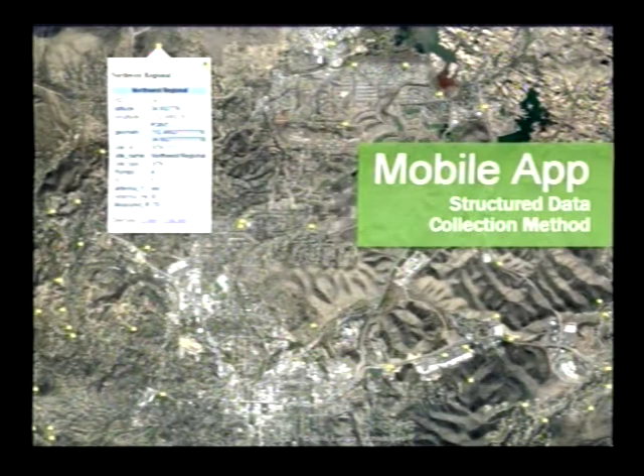The little yellow dots are each one of the sites throughout the town. And as we honed in, we can start to collect more and more information on specific sites, which allowed us to really control that data. As we hone down even farther, we're connecting and collecting data on how we're going to wire up each individual part, what the condition is, where things are mounted, all those different specific pieces of it.

And what that came down to is now we have over 100,000 different data points. When you take all of these different pieces and interface them, it created this large database, which allowed us a lot of different flexibility in interacting with that data.

So the team sat down, we took all of that different data and started aggregating it towards a consistent report format, basically saying this is what we have, this is how we're going to implement that standard for that specific site. It basically aggregated all those different data points.

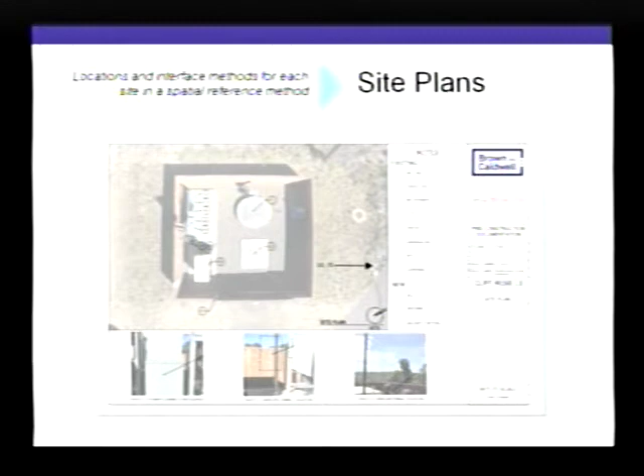We developed site plans, and this was really the visual methodology to allow us to locate things, right? So where that new panel was going to go, where that new sensor type of place, this is the overview to give that visual interaction of where pieces would go.

And then the big thing was cost. So every single little part that we looked at putting in has an associated cost, the labor, the materials, all those types of different things. And the big piece that came through this was really developing as a team what's the right balance of cost versus value.

You can install the latest and greatest technology, or you can install something really basic. So we looked at site criticality, the technology at the time, what's going to best support our long-term viability of the system, and really what's going to give us the best value versus the cost. So the team sat together and utilized that database to determine a balance.

So right now we're still working through those costs. We're looking at approximately a 2-year construction schedule starting sometime in April and going through March 2020. The big thing is with 100 sites, we're looking at concurrently developing those sites. So we'll start on a couple sites at a time and basically stage them as they go to be able to make that in a 2-year construction schedule.

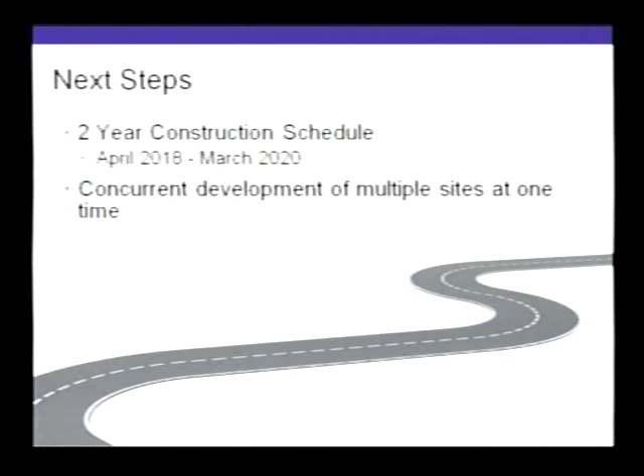So we'll show you guys a little piece of what that database looks like. So this is hitting the reporting structure, and you can see all these little dots in here. Each individual site has a lot of different points.

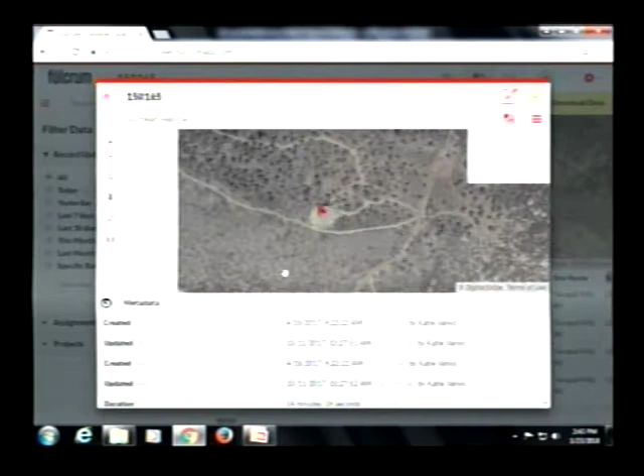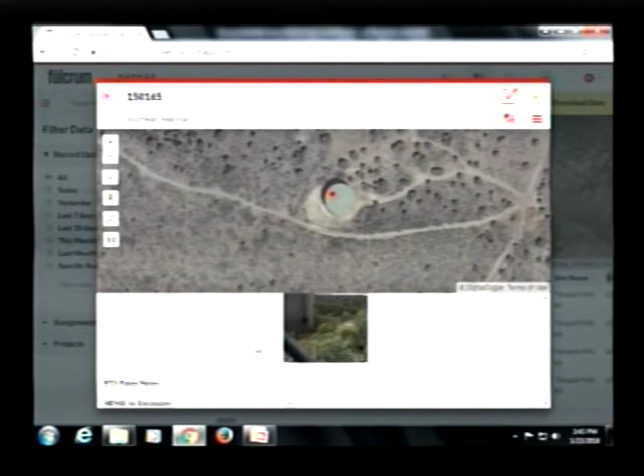So you can see this tank, right, Southwest Regional Tank. When we visited the site, where it's at, how are we going to mount certain panels, structures like that. The existing condition, basically the aggregation of all of this data so that we could apply those standards and really have an understanding of that implementation method and really what it's going to take to apply that standard at that site.

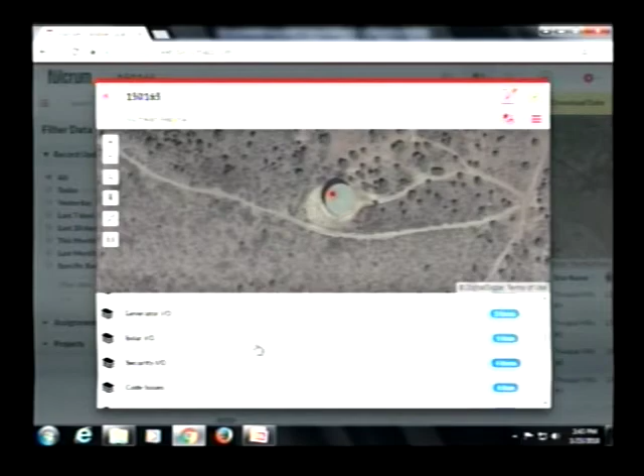As we mentioned, our existing system, when we get an alarm, that's all we get is an alarm. A couple of you recently, through our tours, have been able to see some of this. And then we can zoom out.

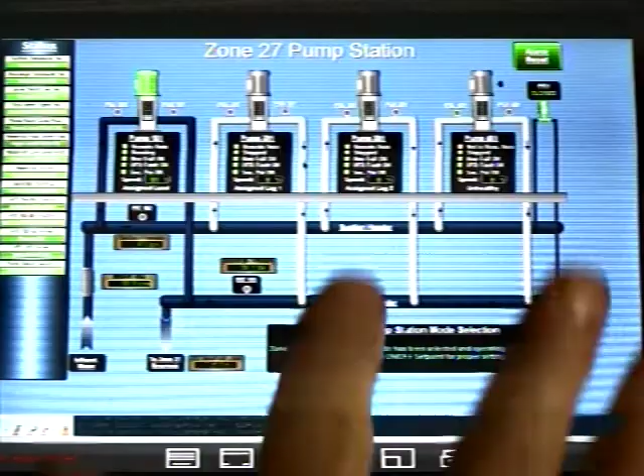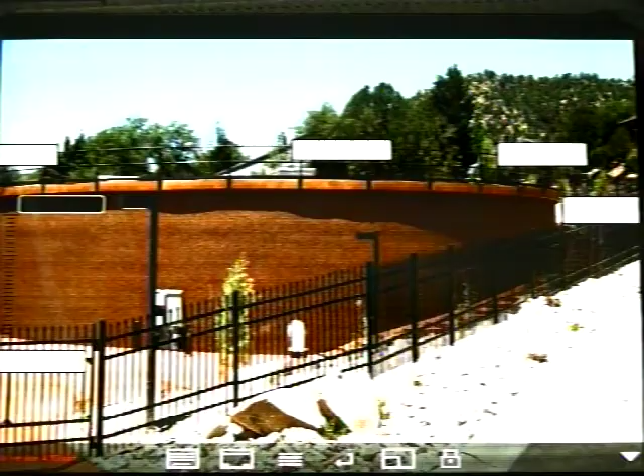So as we have added these in, let's go back to a blank page, kind of the raw pump station. We've added each of these in as the projects have been done.

So now, when we get an alarm, the operator has his tablet. He's able to go in and look at the alarm and see exactly what it is - the tank is low, the tank is high, the pump has failed, we have a power outage, anything like that. He can get that information on the tablet.

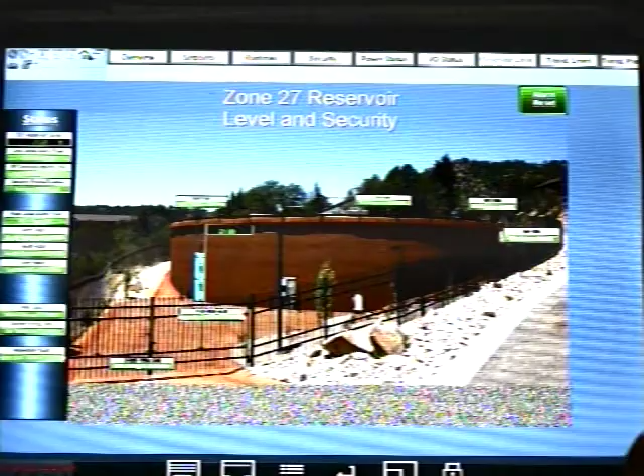Some of our sites we're also putting control into. So right here from the tablet, if Brady needed additional water in the airport area, he can go in on his tablet and turn the well on and get more water. If we have a fire situation, instead of someone having to respond and go to the facility.

Okay. Now, okay, this is pretty cool. So this is all new, future.

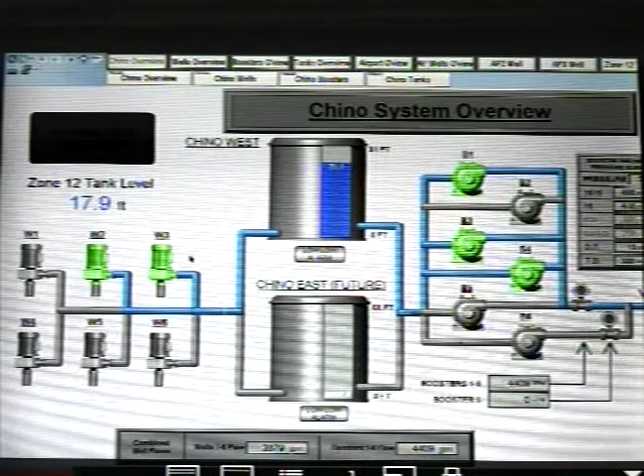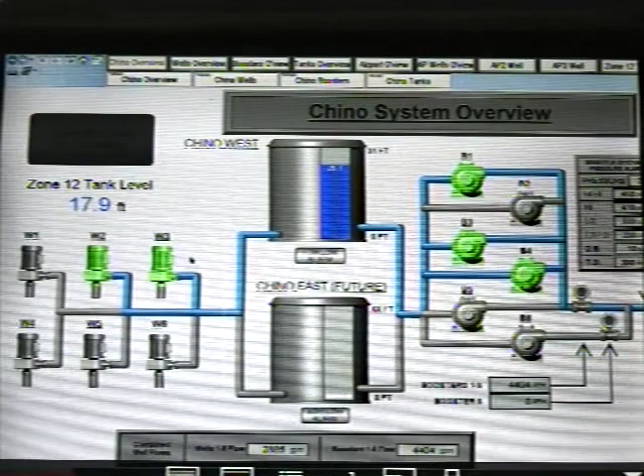Here on the left side of the screen, that's well number 2 and well number 3, are green, telling us that they're both running. Kind of bottom left is telling us that there's 2,879 gallons a minute coming into the tank from those 2 pumps. On the right side, we have boosters 1, 3, and 4 running, sending 4,404 gallons a minute into the city currently, and we have 25.1 feet of water in the tank.

So this is a matter of having that information there so we can know what is happening. At the time when we get the alarms, we can look and find the exact problem. Currently, we get the alarm, someone answers the phone, and they have to leave, go to the site, walk in, and figure out what it is.

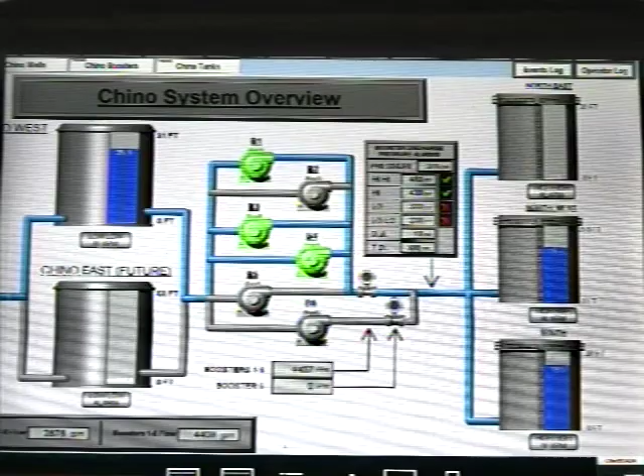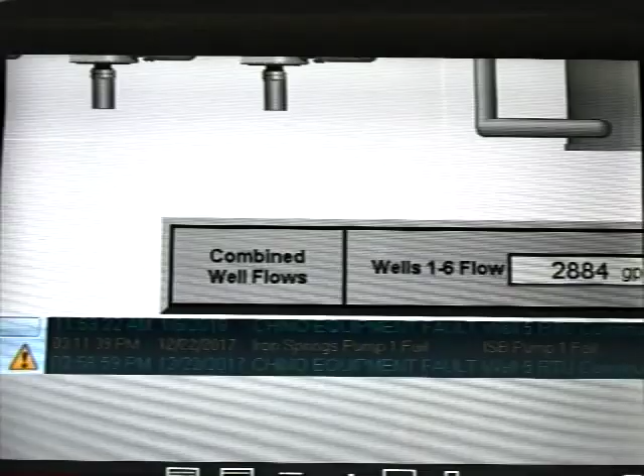So with that, if there's any questions, we'll be happy to answer those for you. Councilman Good?

The premise for installing and utilizing this new system is based upon your estimate of an archaic system that's causing a lot of time, equipment, and labor costs. Have you quantified that and found out what your cost recovery will be for installation and acquisition of the new system? When will you recover that cost by saving all this labor and equipment? And I guess after that, it'll be a return on investment.

We are working on that, and that will be part of the presentation when we bring the construction contract forward. Thank you.

Other questions or comments? Mayor: yes, I have a quick question. So I was out and Brady showed me this system about 1.5 years ago. So you guys are now pretty active in 9 sites, right, Craig? Is that what you're saying? Right on 9? Yeah, yeah.

And we're going to go to 100. So within the next 2 years, we're going to keep putting these on. Not everything's going to go live at once - we're going to go as we go. Each site, as the construction is finished there, it will be added on. It's construction and equipment at the site, then it's the matter of the towers out around the city for the radio frequencies to get there.